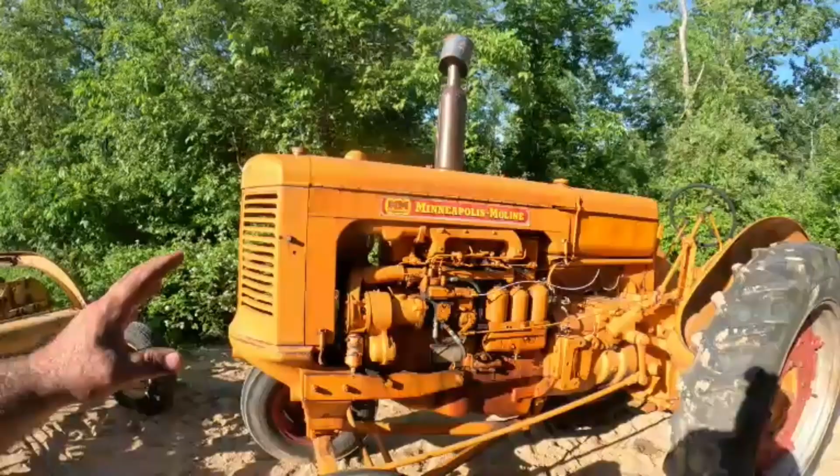As many of you know, this is a Minneapolis Moline UTS diesel. This particular tractor has the Minneapolis Moline made 283D, which of course D stands for diesel. It has the American Bosch PSB pump on it. It's 100% Minneapolis Moline, well, of course Bosch made the pump.

So this is what was sold in the US. I'm sure somewhere in Canada, I'm sure some got exported. But speaking of exported, there was some Minneapolis Molines shipped overseas that were retrofitted, or anyways, they had a different diesel motor on them.

Here, let me get you out of the sun. Sorry, I apologize for that.

Anyways, there was the Dorman diesel and the Meadows diesel. And one of you, Peter, over there in England, which Peter I appreciate you, you comment on every video and I always get it kicked. There's a yellow tractor and the British flag there. I can't, what you call it, Union Jack, is that right? Correct me if I'm wrong.

Speaking of being wrong, quite a few videos ago I was working on that Farmall A, and I was kind of trying to teach Jake to be careful on that battery, not to arc it, because he was prying off the positive terminal and was touching the frame, or other metal other than the battery. And somebody commented that he would not have made a spark, I'm paraphrasing, because the negative post was detached, the cable was off of there. And I mistakenly thought he was wrong, and I said that on a video following that.

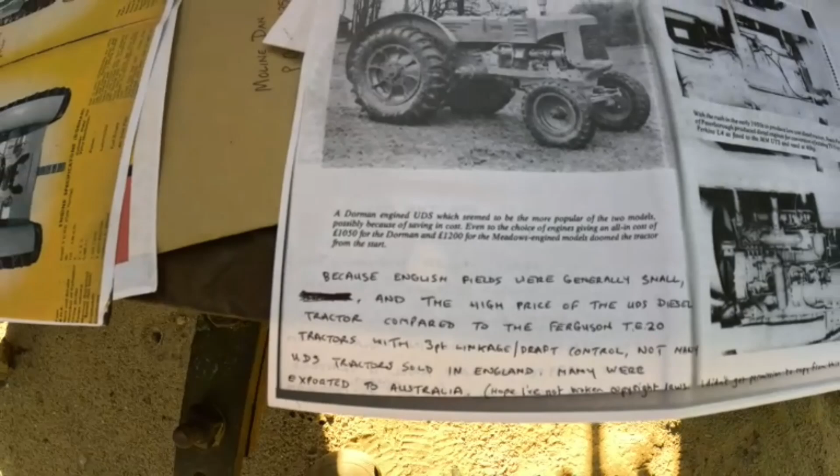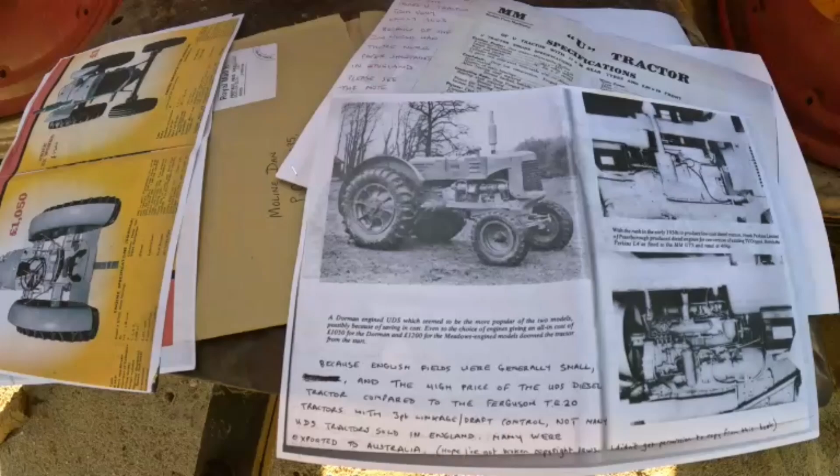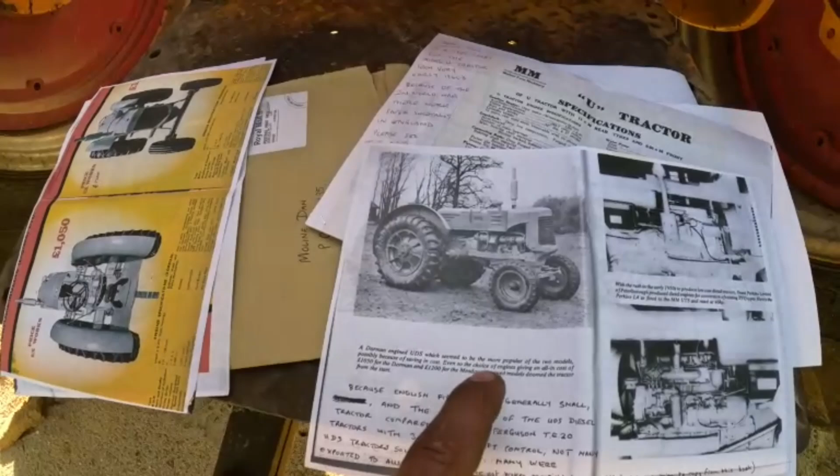Let's see, I'm gonna read this for you here. It says a Dorman engine UDS seemed to be more popular of the two models, possibly because of savings in cost. Even so, the choice of engines given an all-in cost of $1,050, I believe that's pounds, for the Dorman, and $1,200 for the Meadows. So it was a little bit cheaper for the Dorman engine than the Meadows. For the Meadows engine, doomed the tractor from the start - it must be that was expensive.

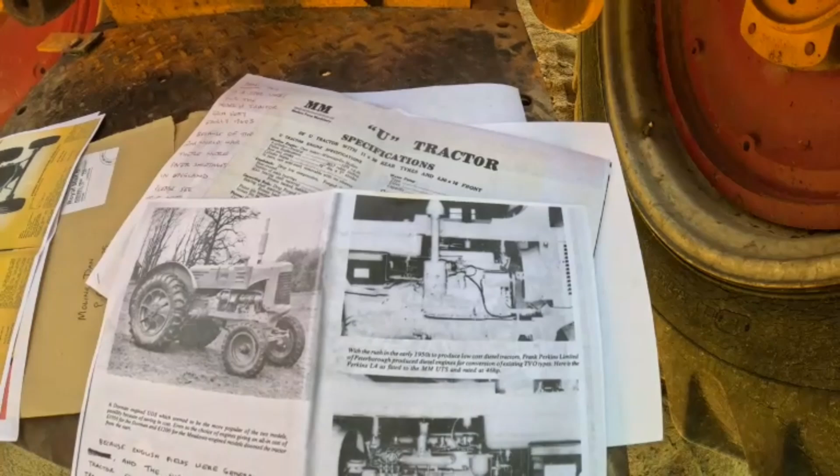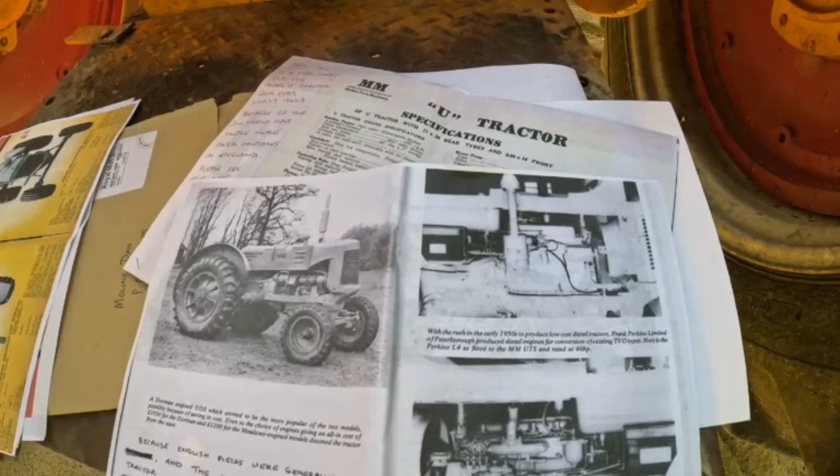It also says, with the rush in the early 1950s, produced low-cost diesel tractors. Frank Perkins Limited of Peterborough produced diesel engines for conversion of existing TVO type. Here is a Perkins L4 as been fitted into a UTS, rated at 46 horsepower. You notice how the air cleaner comes to the outside of the engine.

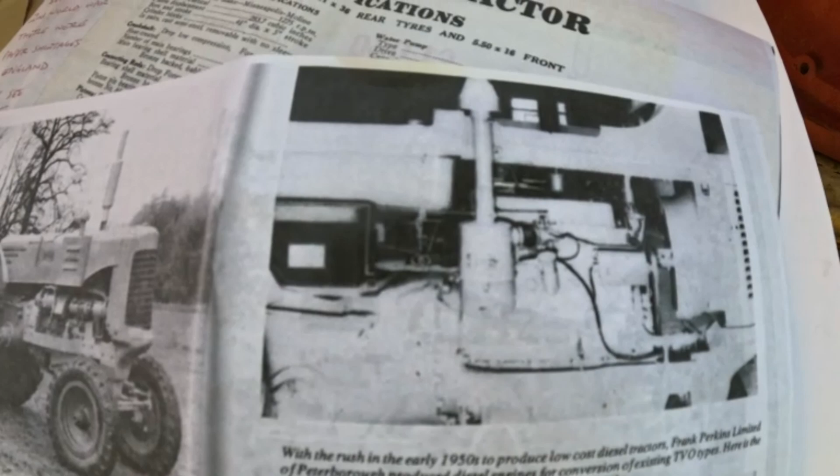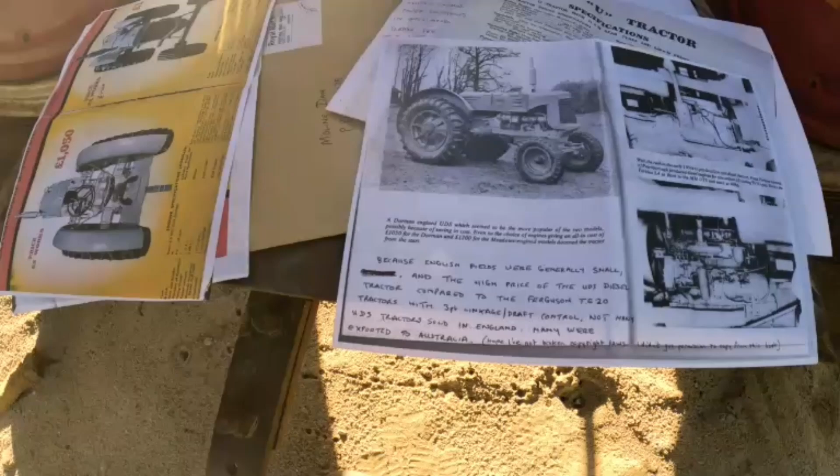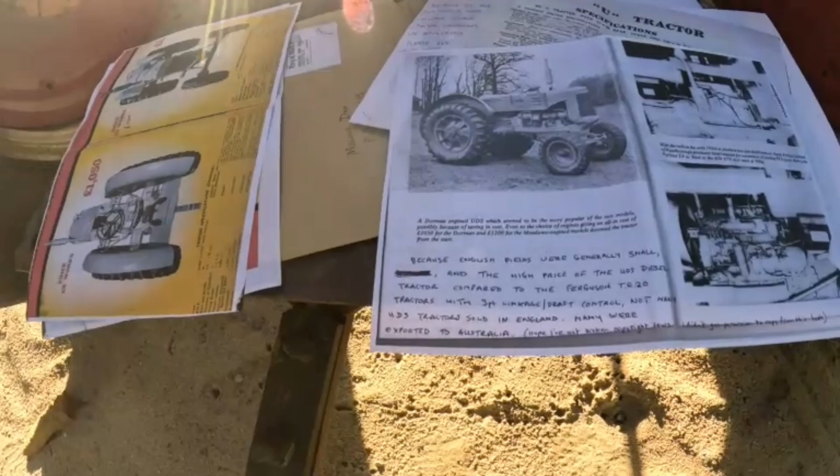Yeah, that's different too. Because this is Peter's writing here, I'll read it to you. Because English fields were generally small and the high price of the UDS diesel tractor compared to the Ferguson TE20 - well, that ain't even close to the same tractor, but that's me talking, not Peter - anyways, tractors with 3-point linkage, draft control, not many UDS tractors sold here in England. Many were exported to Australia.

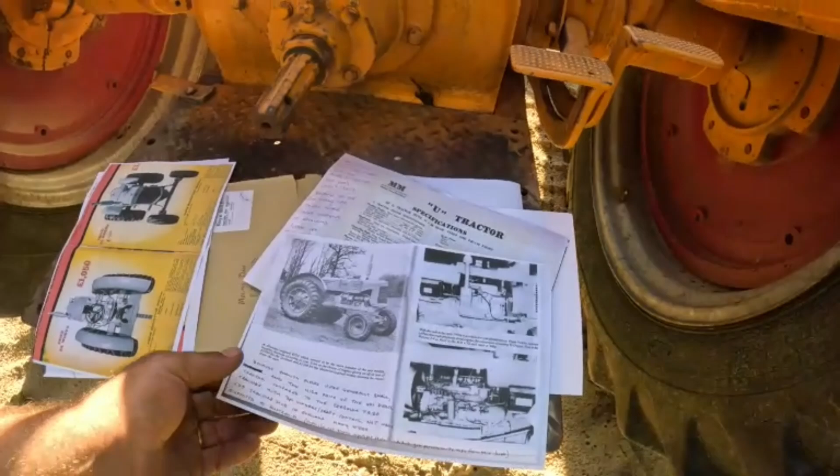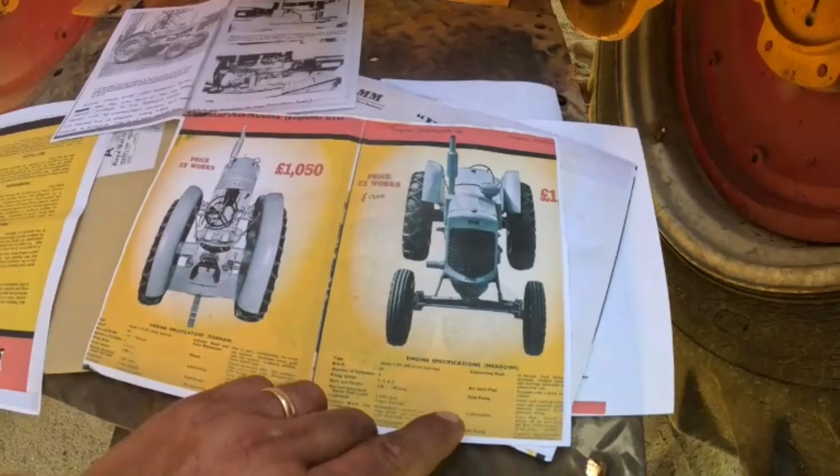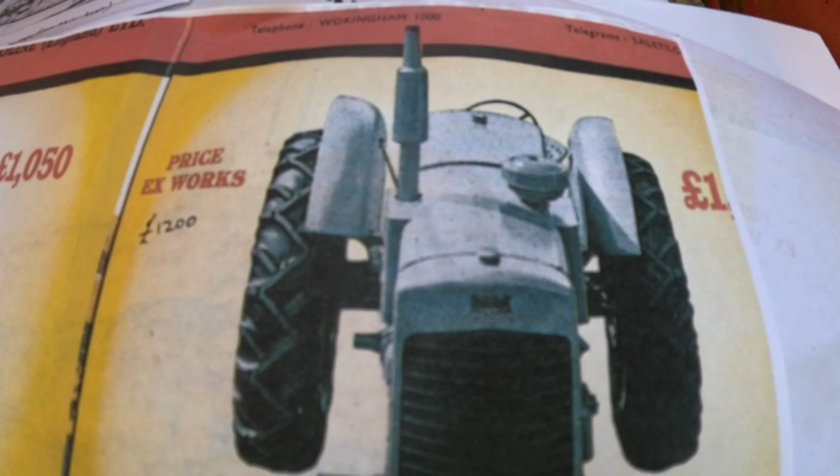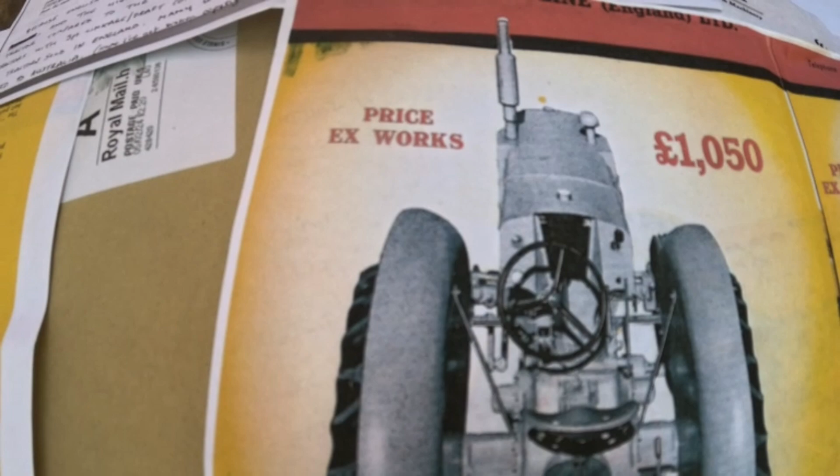So yeah, that is kind of neat. Here's a copy of the sales brochure. This tractor, you can see the difference here. This one has the Meadows diesel, which, the hood looks like it was changed a little bit there and boxed out - get my finger out of the way - and notice where the air cleaner is there. Then this is the Dorman diesel over here, and of course they're showing the back side of it, but the air breather and muffler are the opposite of the Meadows.

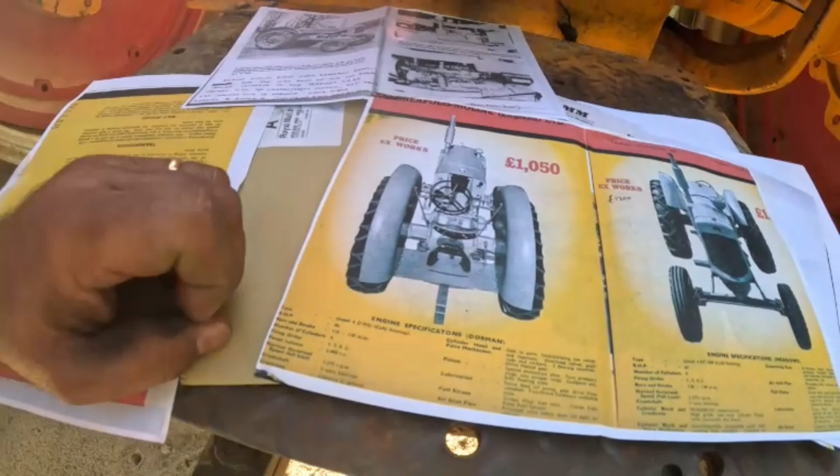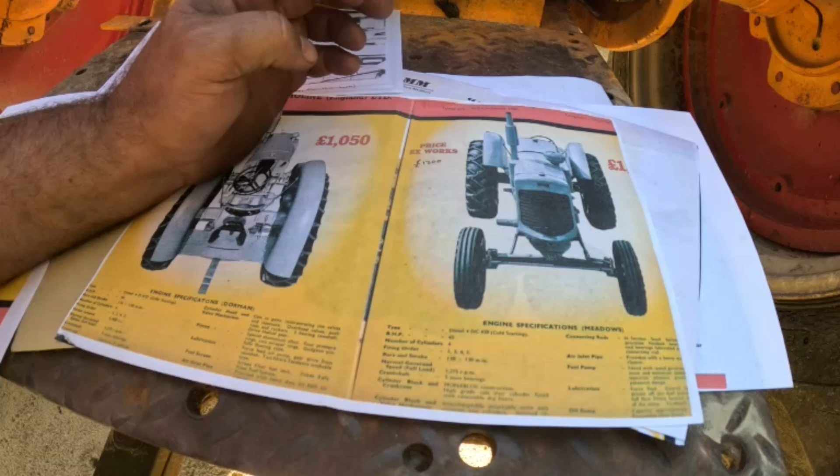So let's look at horsepower here. This one says 46 horsepower for the Dorman, but the Meadows was 65. Wow, and it says BHP, so I assume that's belt horsepower. So wow, that's a big difference there, quite a bit.

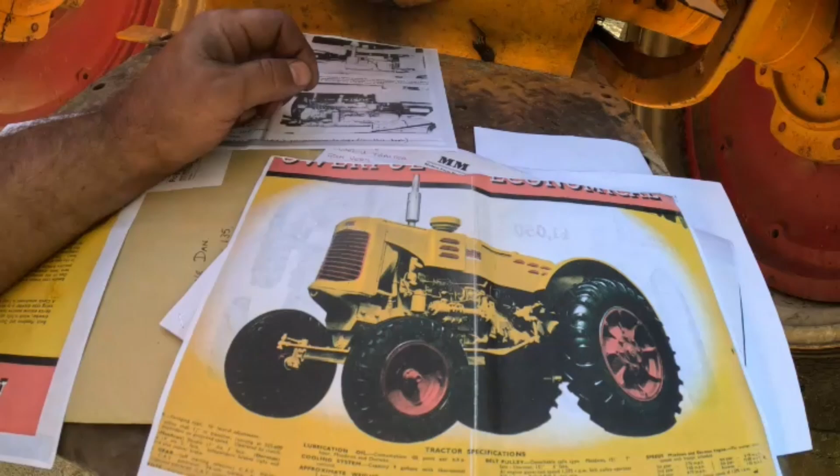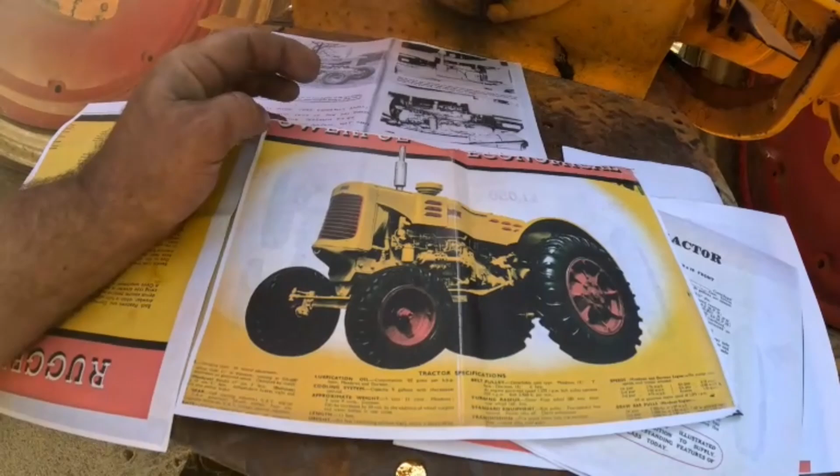Oh sweet, look at this picture here. So this would be the - this one here, right? The Meadows. Yes, all right, so this is one with a Meadows diesel in it. Way cool looking. I mean, there's a lot of differences from what we have here.

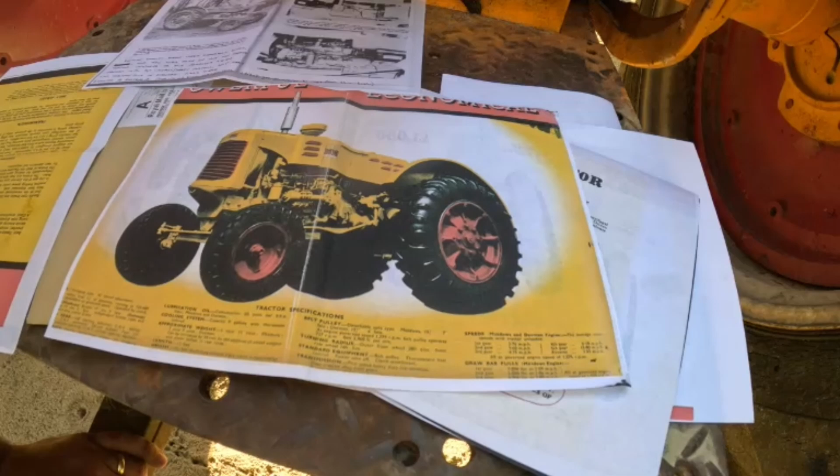So cool. What's going on? Nothing, Jake's out here saying hi. Hi. See, told you he was out here saying hi.

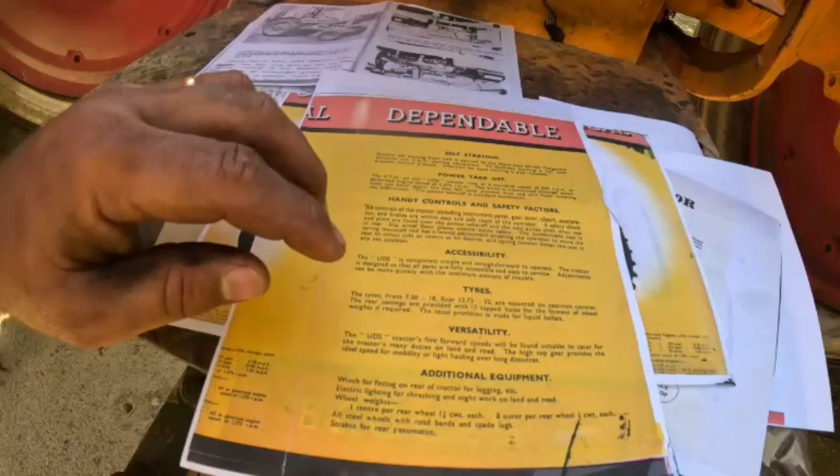Wow, this is cool. He sent me all kinds of stuff, and I'll try to upload the pictures that I have too that he gave me of some of them over in museums over there. You can even notice, like, that's how they spell tires over there in England - where we are T-I-R-E-S, they are T-Y.

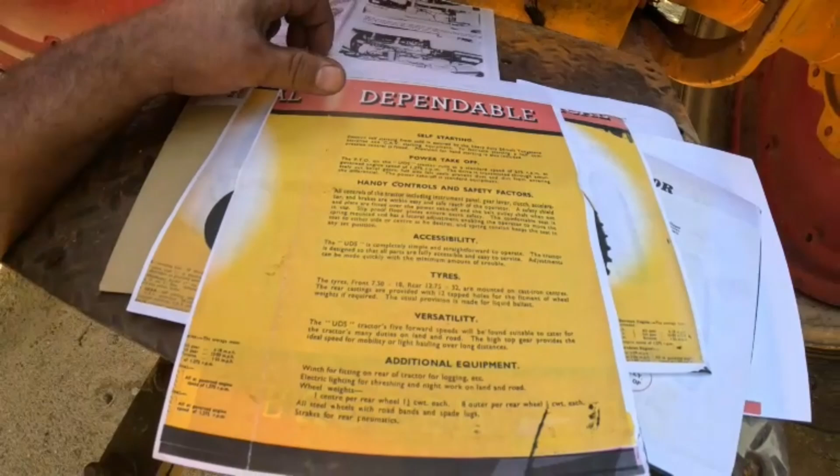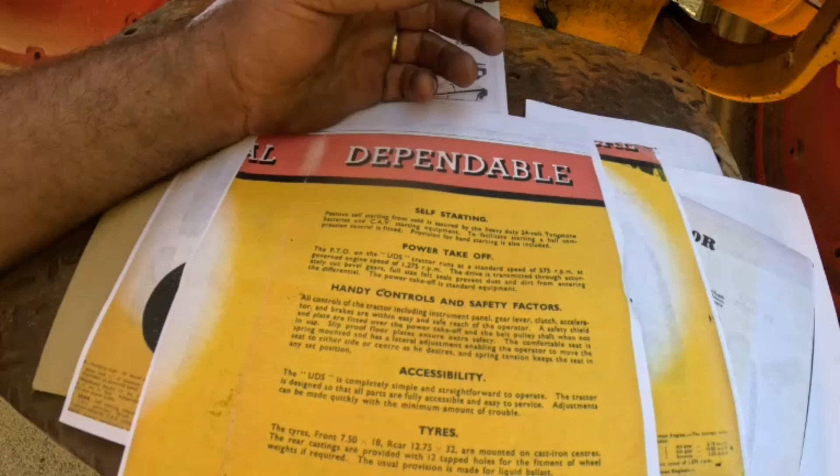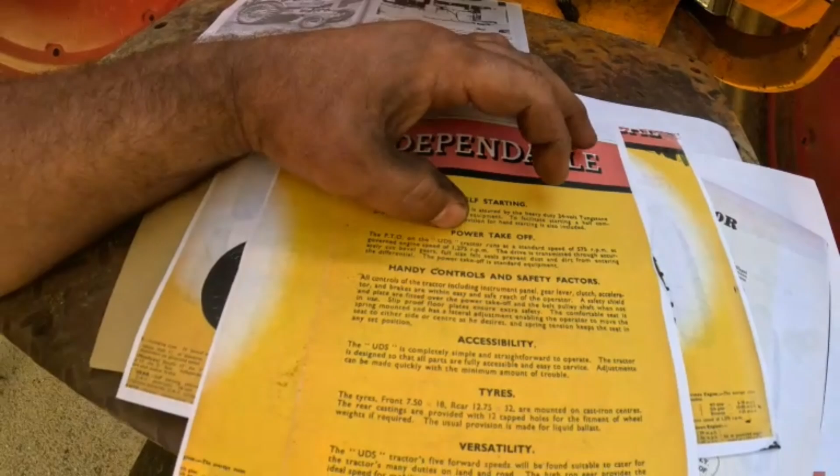Interesting, here's another one too. The PTO on the UDS tractor runs at a standard speed of 575 RPM at a governed engine speed of 1275 RPMs. Isn't that something? Yep, 24 volt system, that's neat too. So, all right.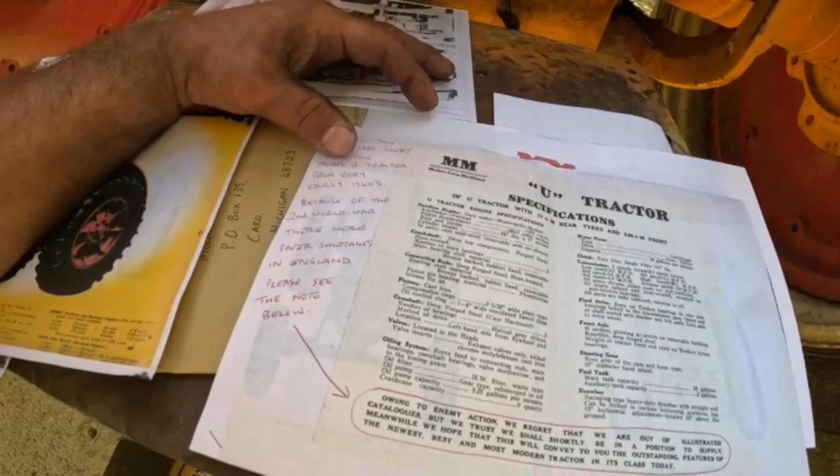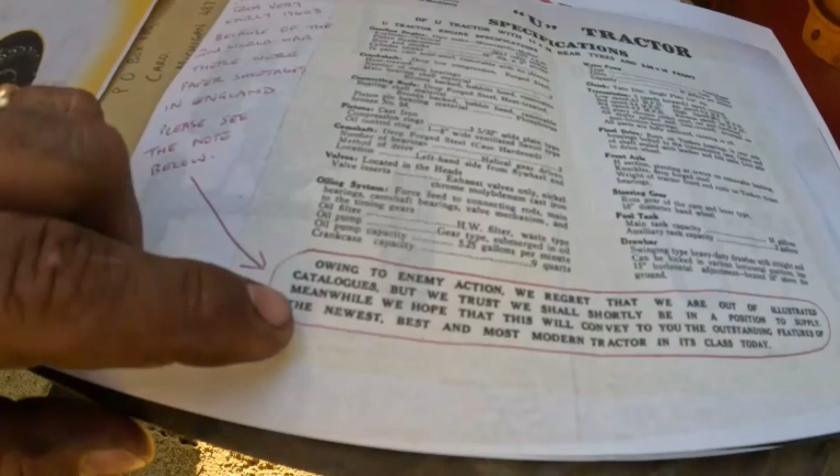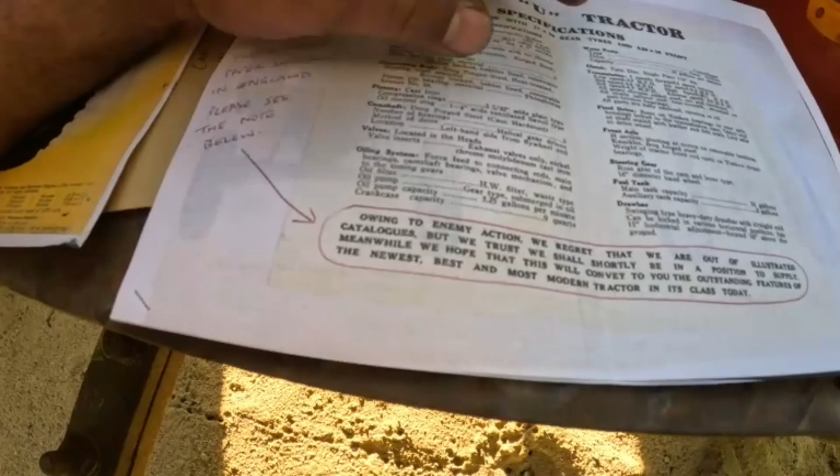More specs. This is a spec sheet for the Model U from the very early 1940s. Because of the Second World War, there were paper shortages in England. Please see note below - this is kind of neat. I know I've already read this once, but owing to enemy action...

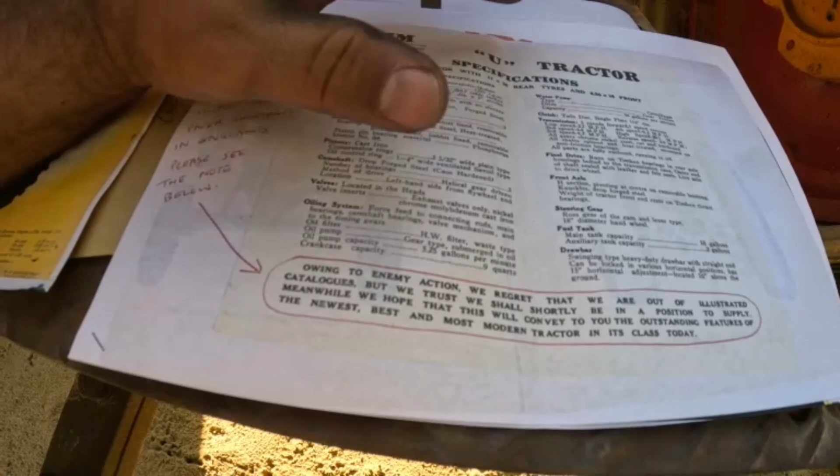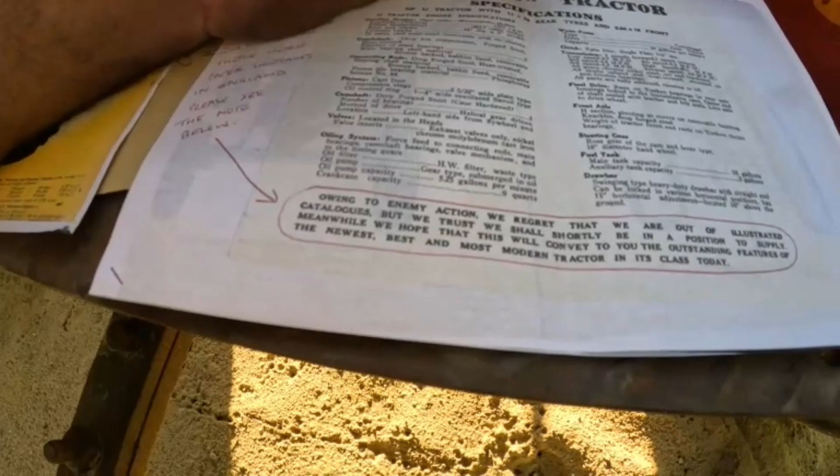I'm sitting between these two fenders, and they're echoing, but I just thought with the lighting this was the best spot. 'We trust we shall shortly be in a position to supply. Meanwhile, we hope that this will convey to you outstanding features of the newest, best, and most modern tractor in its class today.' I just think that's kind of neat.

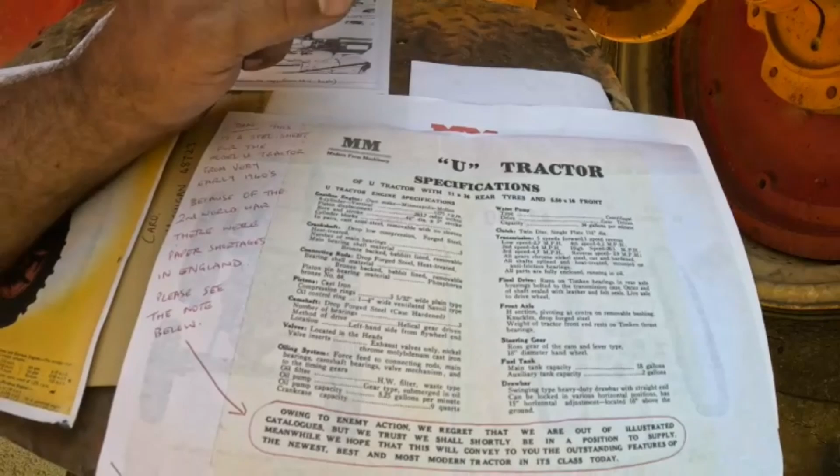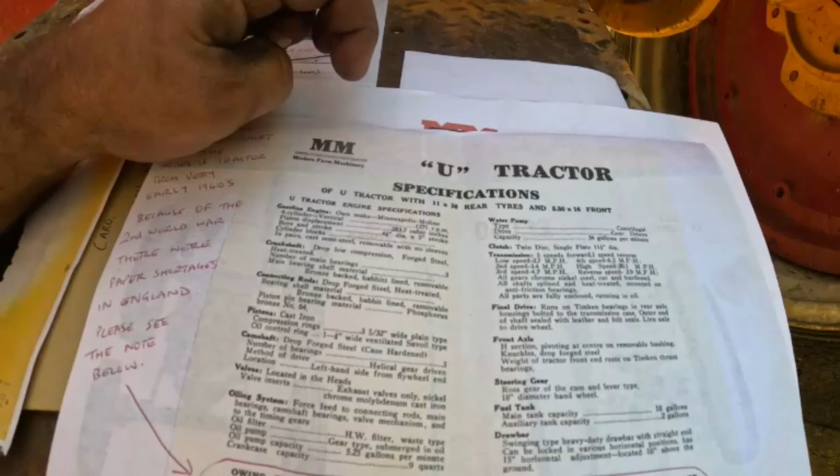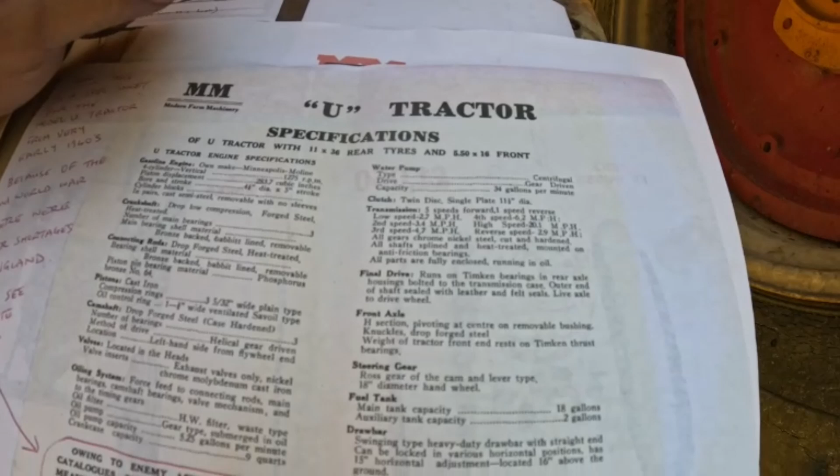So, U tractor, 11-36 rear tires, 5.50-16s on the front. The gasoline engine, Minneapolis Moline engine, 283.7 cubic inches, 1275 RPMs, 4 1/4 inch diameter by 5-inch stroke. I don't know if you guys can read all that, but it sure is neat. High speed 20.1 miles per hour, it says. Capacity 34 gallons per minute - that's the water pump.

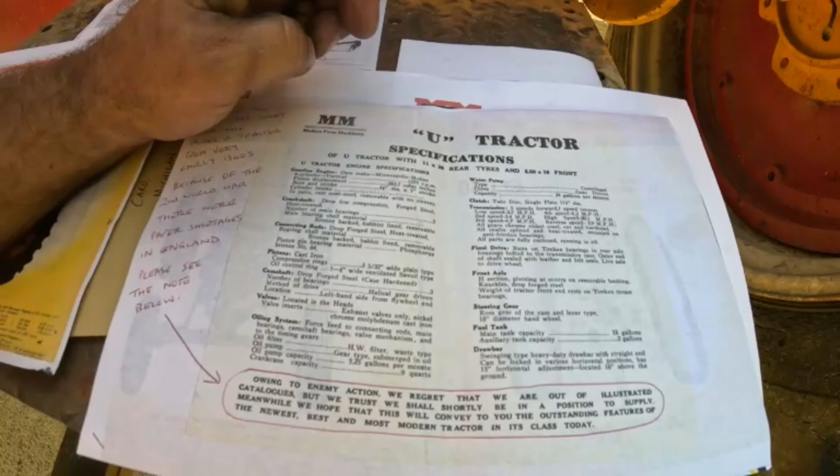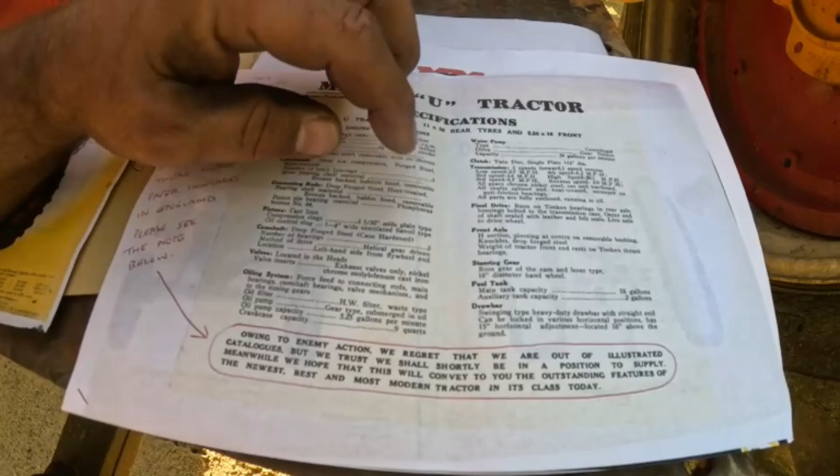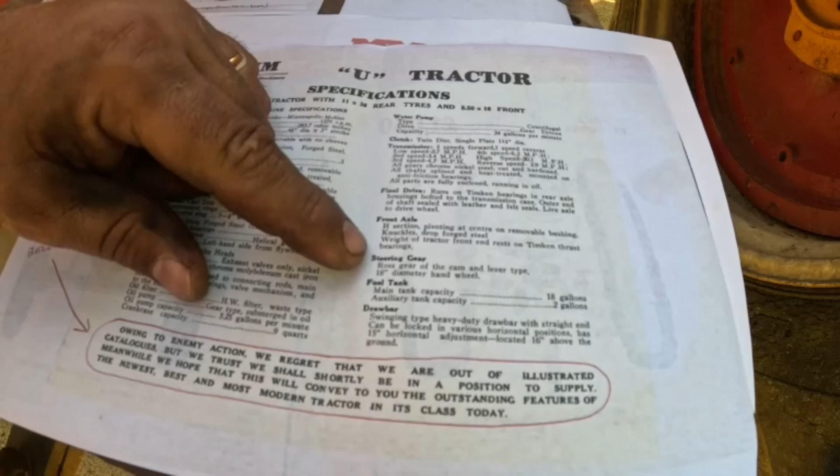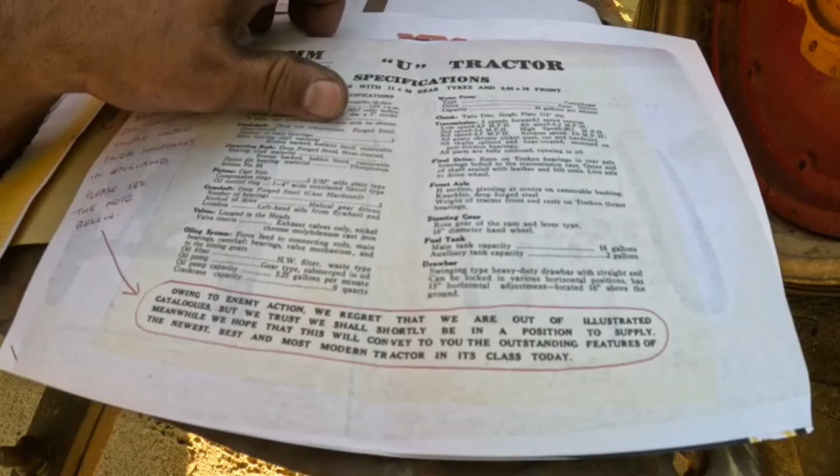All right, what else we got here? There's just a lot of neat information on here. Front axle, H section, pivoting at center on removable bushing, knuckles, drop forged steel, weight of tractor, front end rests on Timken thrust bearings. So Mr. Timken supplied those too. The main fuel tank held 18 gallons, and there was an auxiliary on these, apparently 2 gallons. That's just pretty cool.

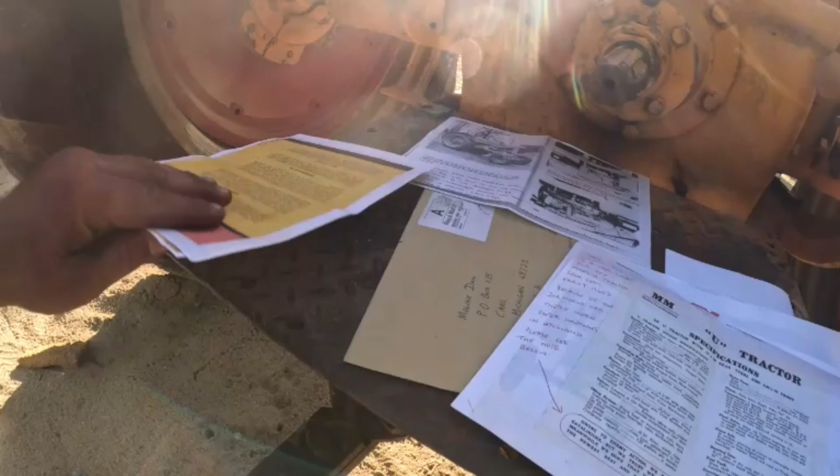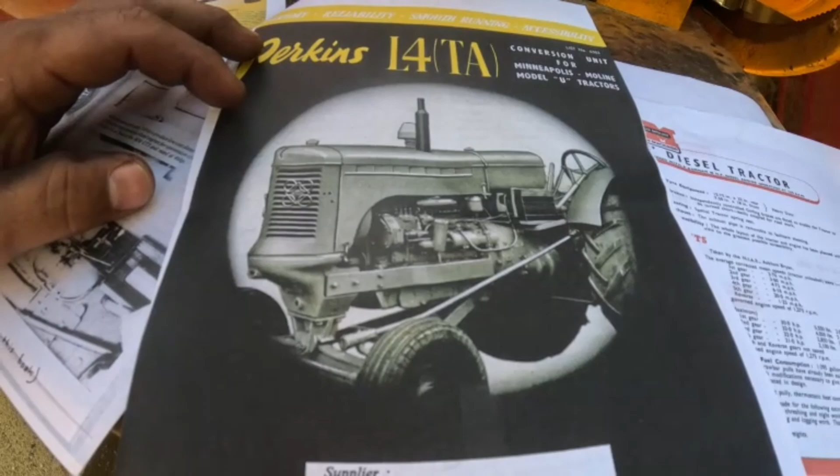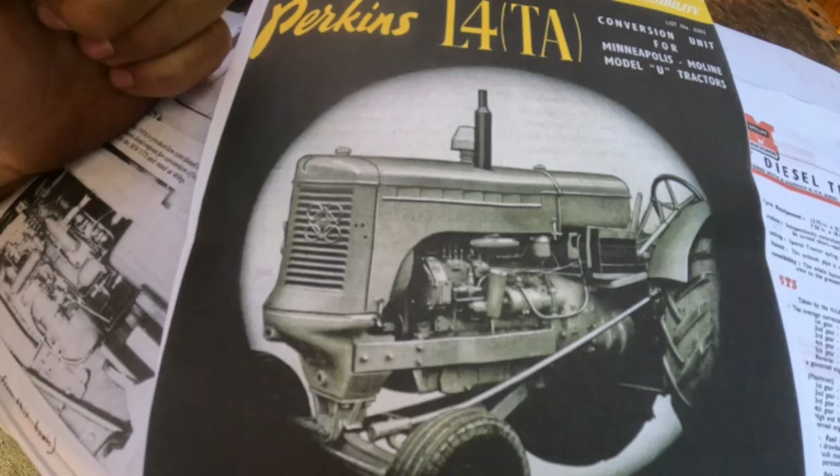I can't say enough about all this stuff. This is so neat. I can grab my phone - he's got so many, oh look at this. All right, here's another picture of the Perkins L4. You can see that. That pump there looks like a pump on a Cummins, but something similar - I mean, I don't think it's the same because it's Perkins, but look, this is neat. You see that? See if I can get zoomed in there. I think it says MM right in the middle of that.

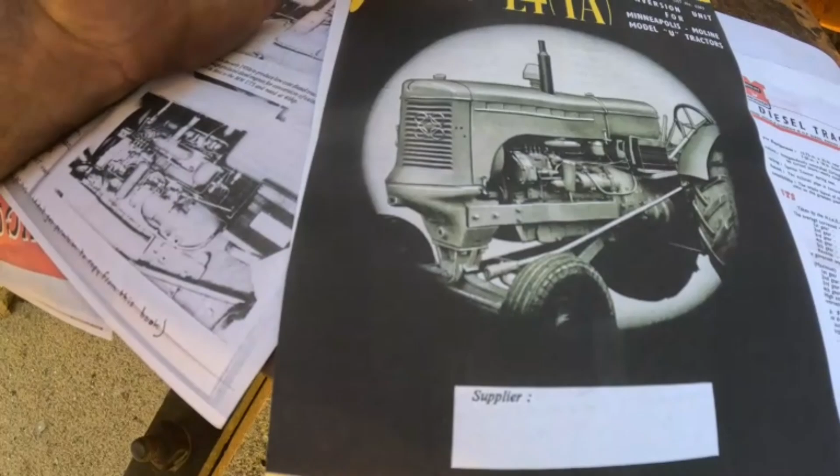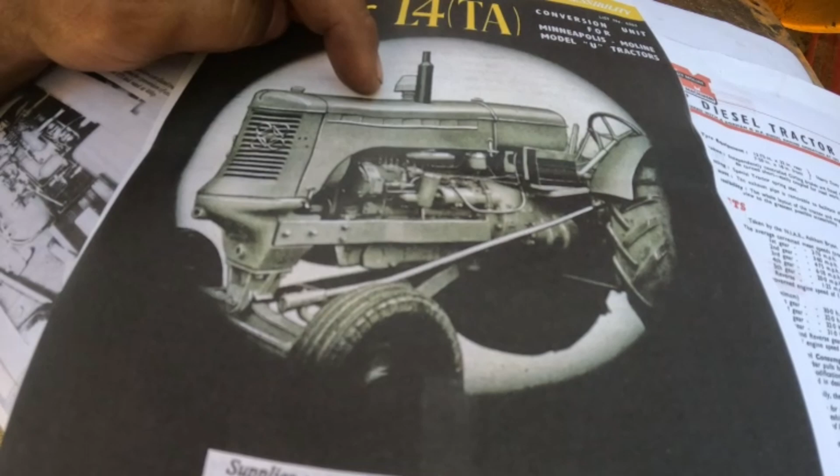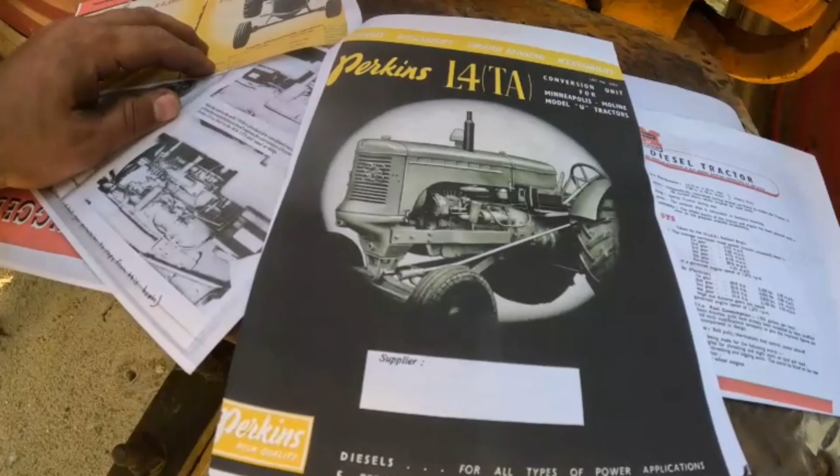Kind of looks like Olympic rings, but I don't know. This tractor's got a bullet muffler that's back farther than normal - you know, it would have been over here. The breather's way back there. It's got a cast iron steering wheel on it. This is, yeah, beyond cool, that's for sure.

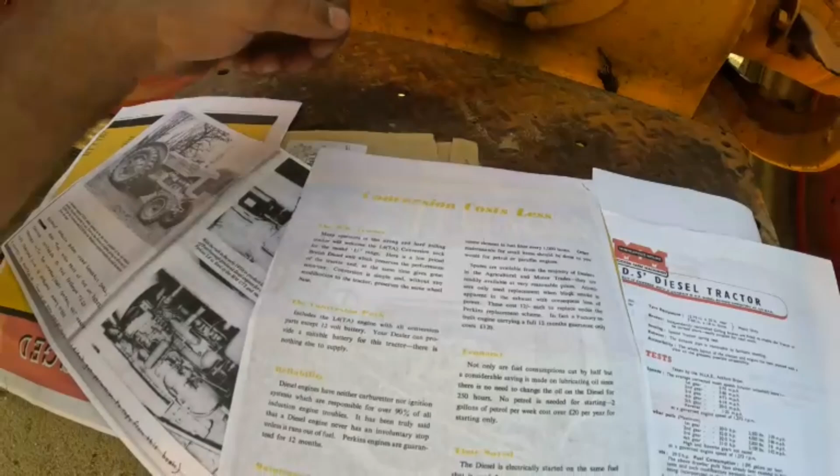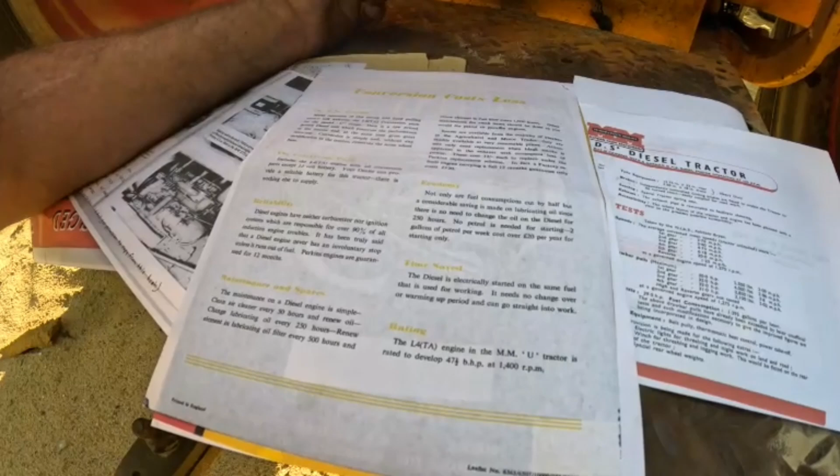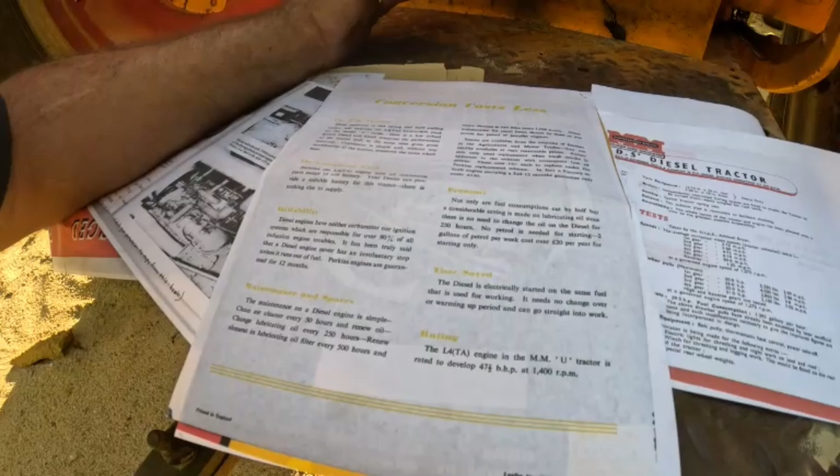All right, let's see what else. Yep, oh man, so there's so much to read here. And it says the L4 engine in the M.M. U tractor is rated to develop 47.5 belt brake horsepower, which like I said, that's probably belt horsepower at 1400 RPMs. So neat. A lot of cool stuff in here, lots to read.

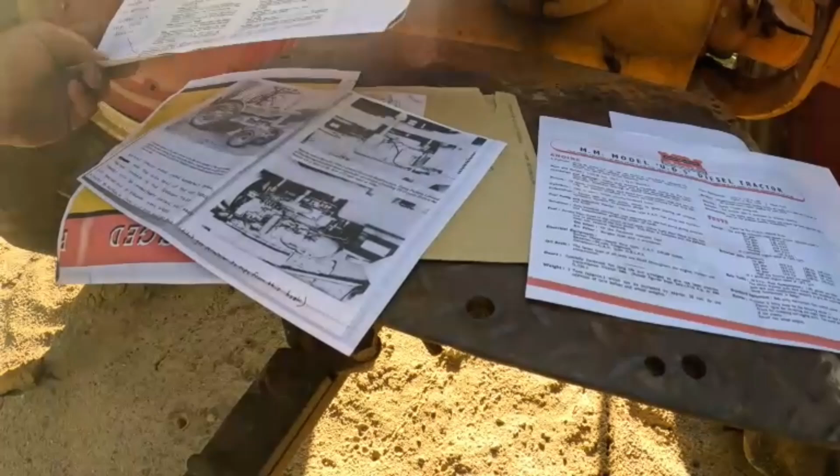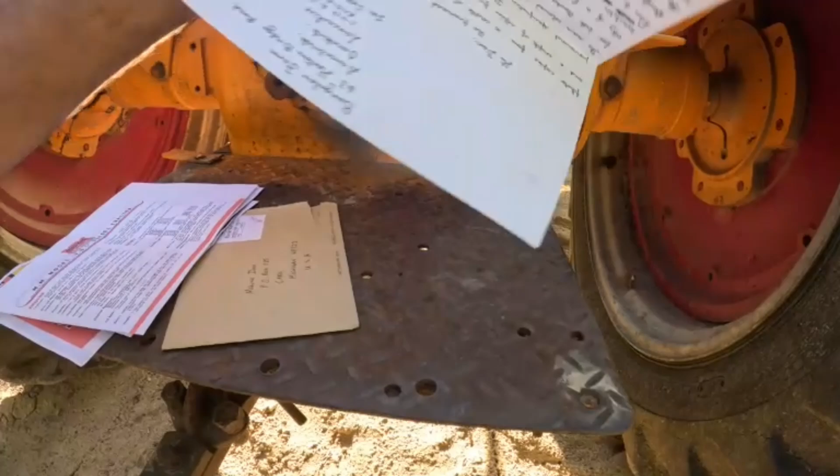But cool. Well, I just thought maybe I'd share that with you, so you guys that are over on the other side of the pond, you see those more than you see these. You got something over there that we don't have. I personally have never seen one of those.

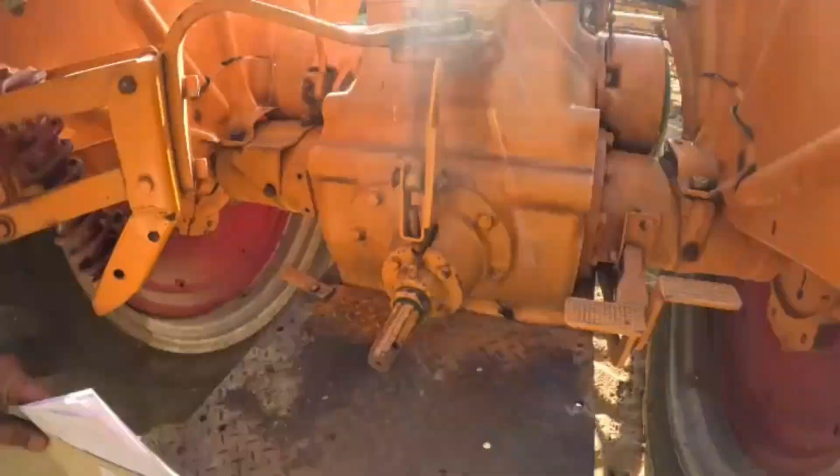I know, what did they - I can't remember what it was. I think it was a Dorman diesel, was in the Turkish ones - they call them the Turks. Anyways, that was kind of a neat thing too to see. Have I seen one? I don't think I've seen one - no, I'm second guessing myself. I think I have one in the collections out west, but I'm not positive on it.

But yeah, I'm gonna try to share those pictures that Peter sent me of ones over there in England.